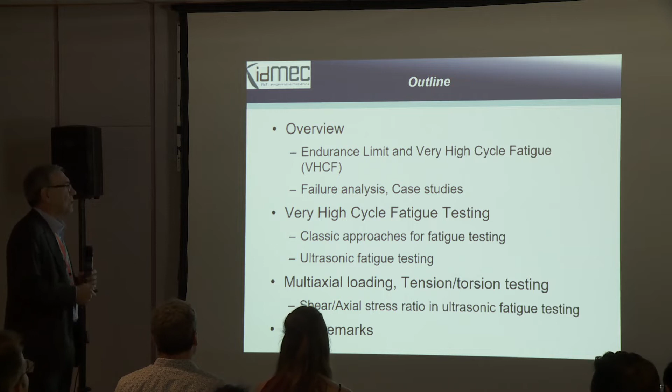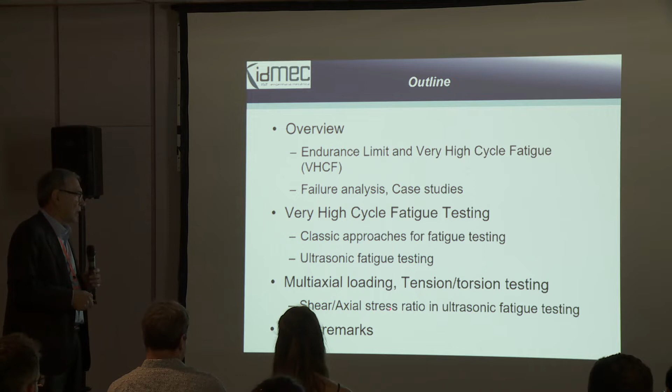So this is the summary of my talk. I will start by putting here some cases where very high cycle fatigue happens, even if it is not initiated in inclusions. After, I will present our approach for studying very high cycle fatigue based on ultrasonic fatigue testing, and I will make the most part of my talk talking about tension torsion testing with shear axial stress ratio, how we can do that.

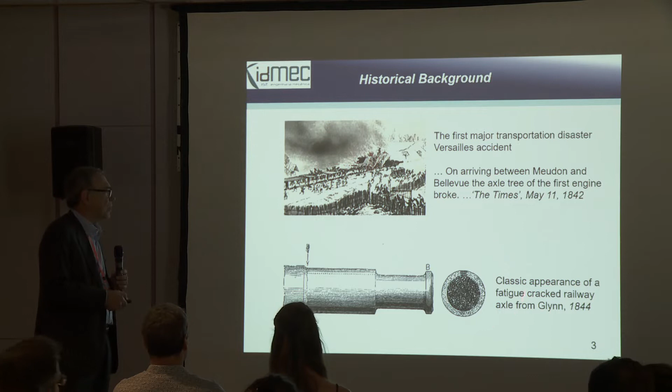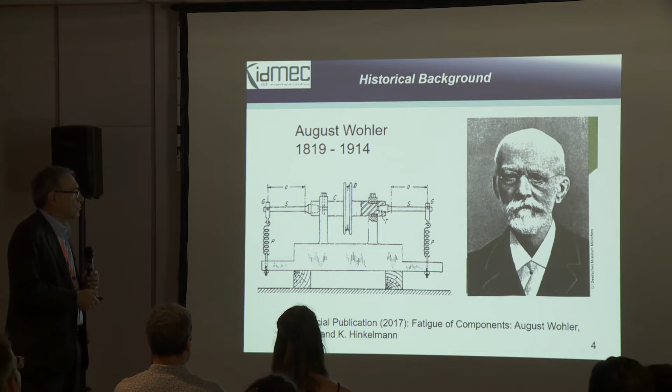So we all know that fatigue begins with railway transportation, and this was the first accident related with fatigue, and at the time nobody knew what happened, but happily August Wöhler in the 19th century introduced to us the concept of endurance fatigue and fatigue limit, but we know that this is not true.

And happily we have many failures below the so-called endurance fatigue limit, and the question that we have posed to ourselves is: is the endurance limit a simplification due to testing limitations that happened in the 19th, not early 20th century, or is it really a material characteristic?

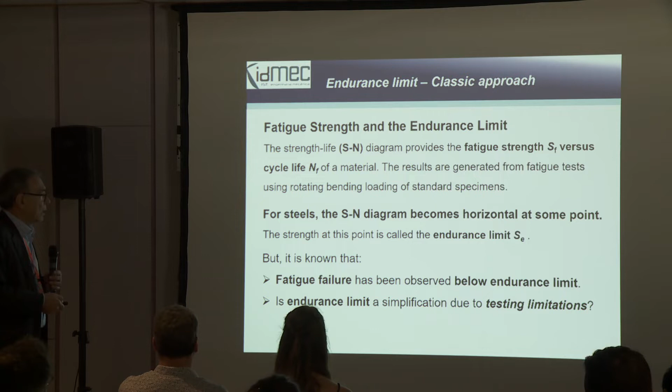So what tools do we have in order to test fatigue limit? We have classical machines for making till 1 million, 10 million cycles, and after we have the question: is there a fatigue limit?

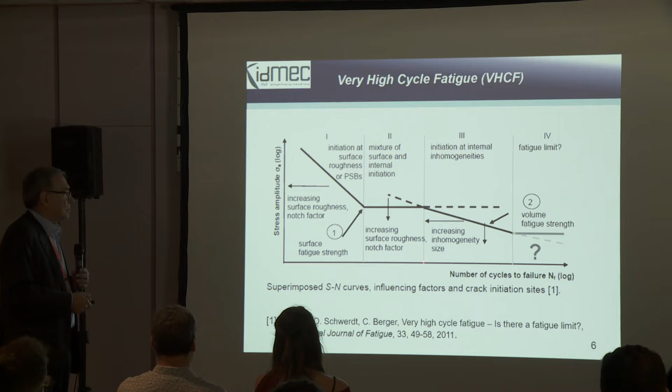There are many papers, by Claude Bathias or Pyttel, where this question is trying to have its answer. So, but going from here to there is quite difficult because we have several situations.

I will present here three case studies where this is not a very high strength steel like those ones where the crack initiation is in inclusions, but this is a low alloy steel, but high strength steel.

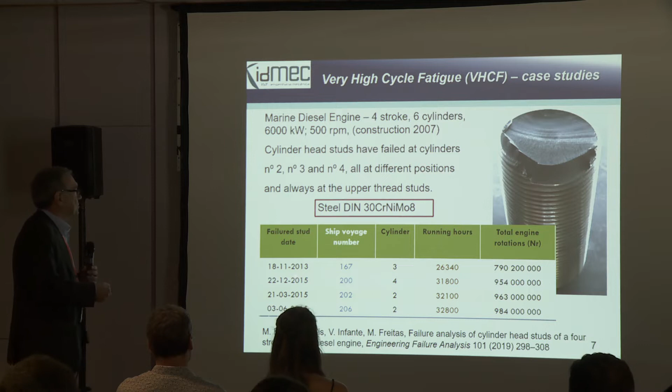For example, this is a cylinder head stud used in engines, marine engines, and you can see that we approach 10 power 9 cycles. This is not a very old engine, it has 6 years, so there is overload on an engine.

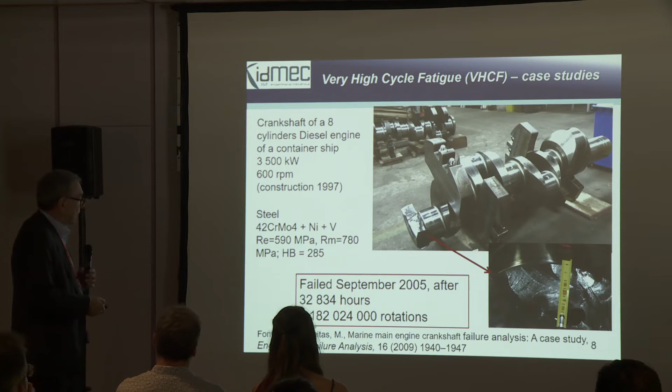The second one is that one, where here we have bending and torsion, so multi-axial loading again, more than 10 power 9 cycles. This is not a very old engine also.

And the final one, this one, where two propeller shafts also broke, and you see that there is no overload because the fatigue region is very high. And again, we are approaching 10 power 9 cycles.

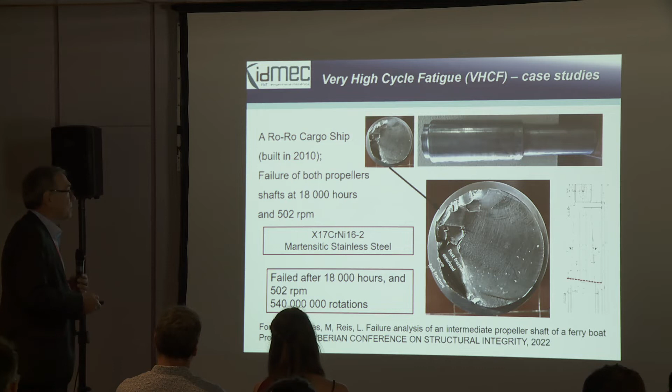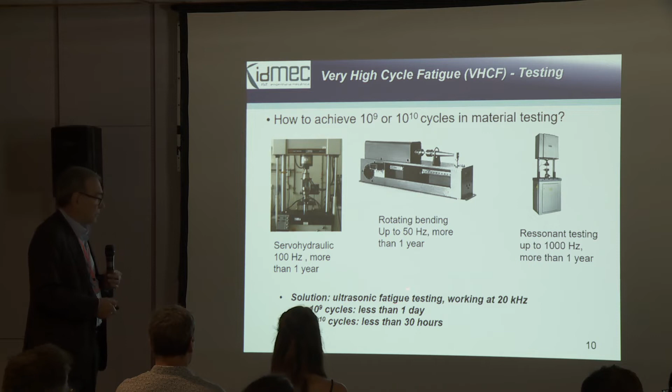So how can we solve that? How can you determine if there is the endurance fatigue limit or there is not the endurance fatigue limit? So the classical way is servo-hydraulic, resonant testing, increasing frequencies, but indeed, we thought that the solution is ultrasonic fatigue testing. We can make 10 power 9 cycles in 1 day, or 10 power 10 cycles in less than 30 hours. Of course, we have many problems because we have the strain rate effect, we have the temperature effect, and very important, we must have the data acquisition in order to control the test.

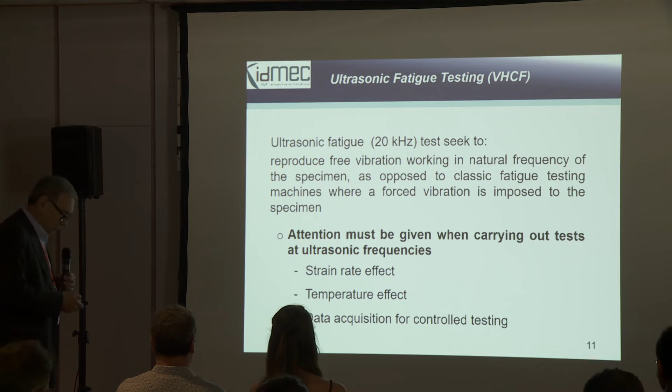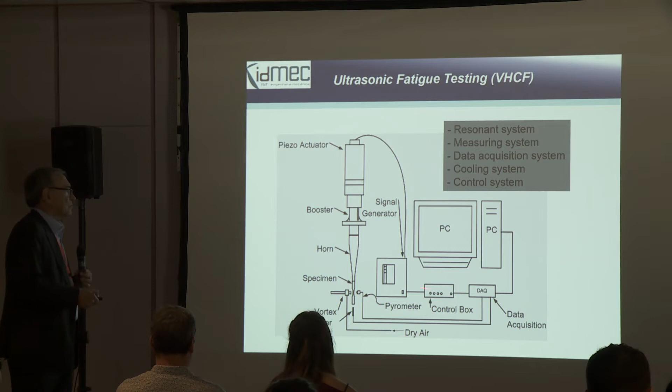relating to temperature, loading, frequency, etc. So that's why the machines normally are composed of a piezoelectric actuator working at 20 kilohertz, a booster, a horn, and the specimen, and we have all the things like cooling, temperature measurement, laser measurement. Normally we put also strain gauges there, and we have the data acquisition system that everybody has presented before.

And the idea is to have everything in resonance, either the piezoelectric actuator, the booster, the horn, and the specimen. So for axial loading, this is quite standard already, so I am not going to explain this.

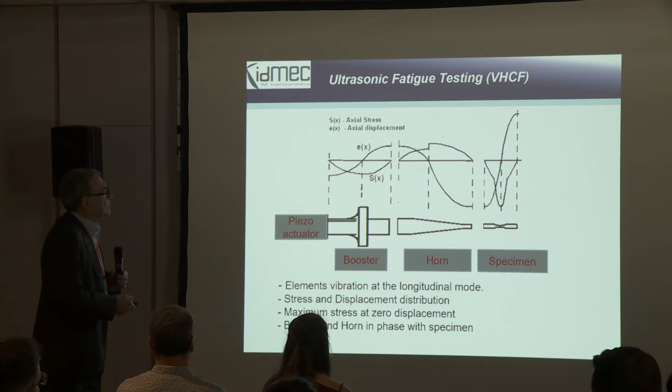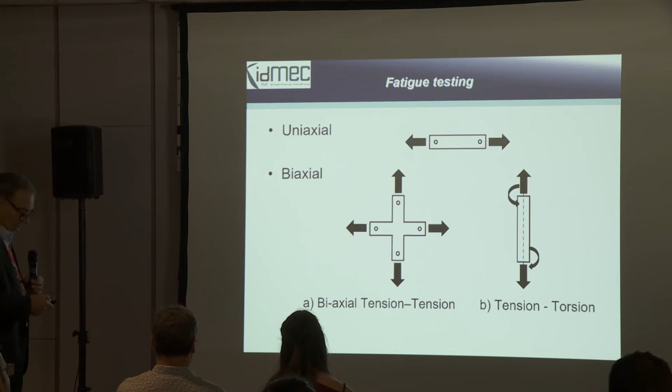What we want to do is this: uniaxial, we do not care much more about uniaxial. 2 days ago, our colleague Diogo, who worked with us, talked about ultrasonic fatigue testing of cruciform specimens. We have tension-tension, and we have tension with torsion.

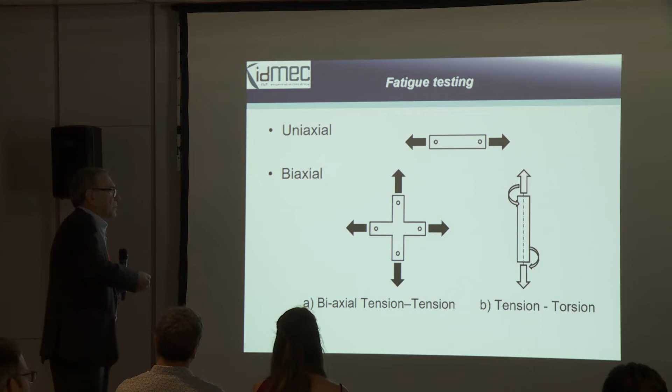And now I will present this, the tension torsion solution that we have. And this afternoon, Pedro will speak a little more about this, the technology that we have in order to achieve this. So this is our machine.

So it seems complicated, but it's not complicated because the machine is only that and only that. All the rest is the strain gauge acquisition, temperature measurement, laser measurement, and controlling. So we have 2 machines here. This is our laboratory. We have 2 machines.

And what is important is that we are making either cruciform specimens, torsion specimens, uniaxial specimens, or tension torsion specimens, always with the same piezoelectric actuator. We only change the horn and the specimen.

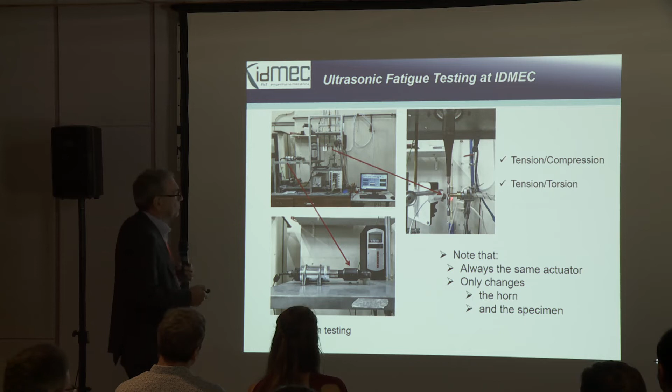And we can see, I'm not going to speak about the tension torsion, you can see our tension torsion specimen. We have 3 throats: 1, 2, 3. So this is the solution that we have for tension torsion.

Why do we have 3 throats? Because, of course, everything is resonance, either axial or torsion. And as we know, the shear modulus in torsion is about 1/3 of the Young's modulus. So we must look for the eigenfrequency in torsion that relates to that.

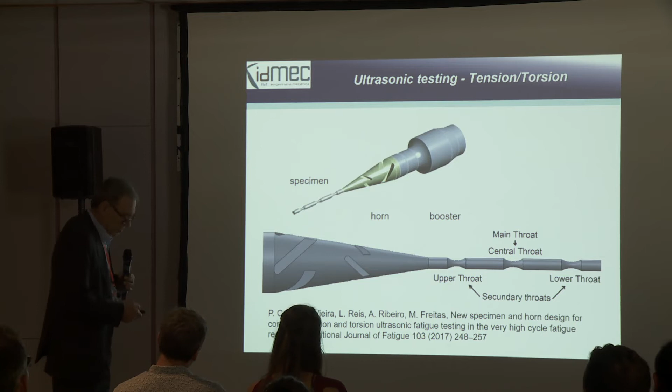So we have maximum torsion here, maximum torsion there, and maximum torsion there. But axial, the maximum is over there. So what is interesting for us is only this zone. So this is

the solution that we have. So we have the piezoelectric actuator, we have our horn. So we make grooves over there in order to transform the axial movement into axial and torsion rotation.

And after that we have here the solution with the 3 throats in order to have everything in resonance, either rotation or axial. So as we know, at this throat and this throat, we also have tension and torsion, but the tension is much lower than torsion, so the specimen will break here and not there or there.

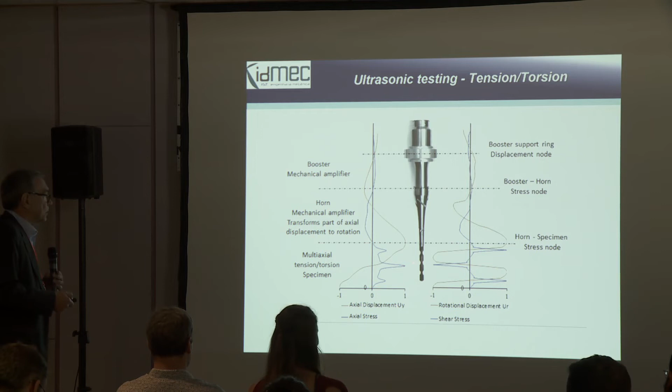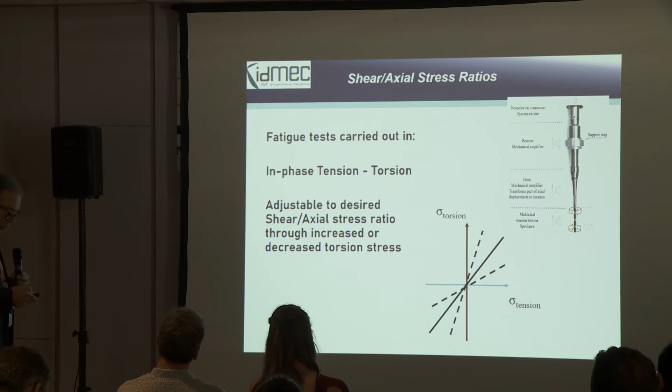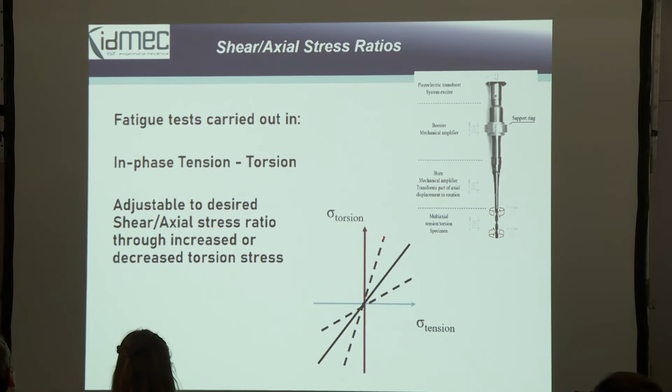So we have presented the other solution for only one tension torsion ratio. But what I want to present to you today is how we can do different shear to axial stress ratio, and what must we change here in the booster, in the horn, or in the specimen in order to have different shear to axial stress ratio.

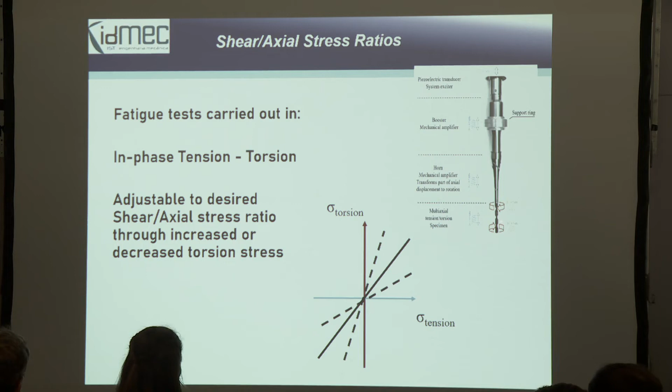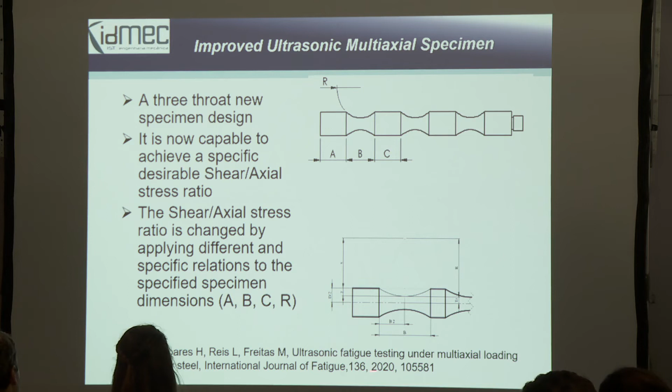So you have some explanation about this, and this afternoon Pedro will talk a little more about this in this paper. So let's see our results.

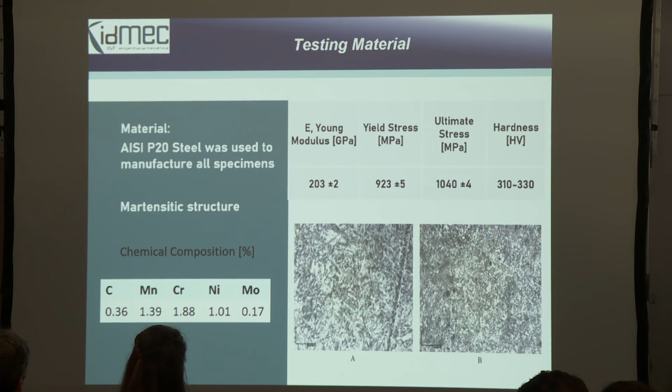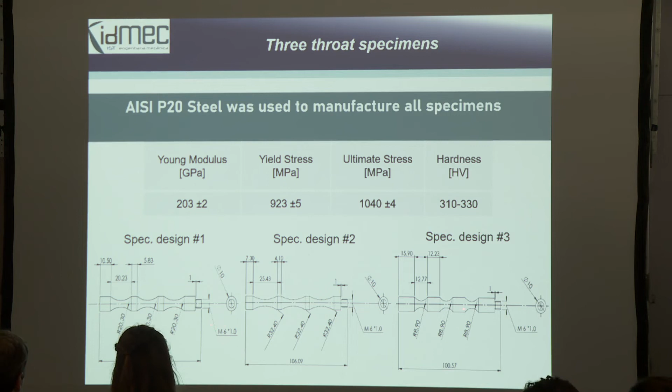And we have here three specimen designs. In each one, we will have a different shear to axial stress ratio, because we have changed the A, B, C for the same radius. So we have tested this, and we are going to present some results.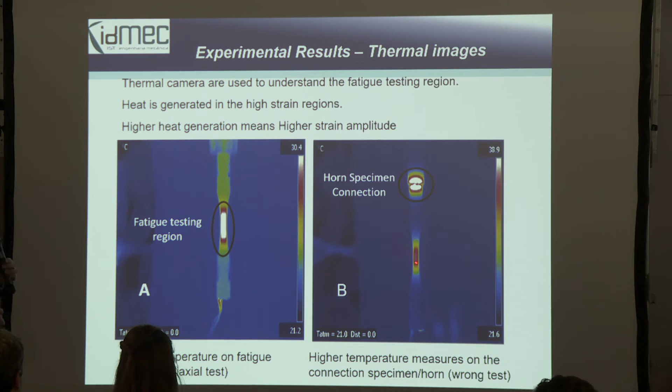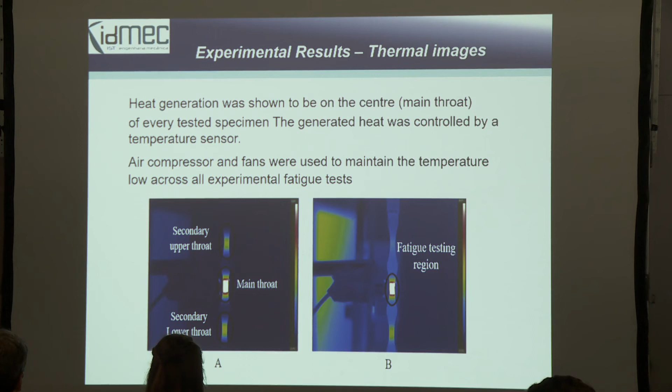So for the three-throat specimen, here we have torsion here, torsion here, and some axial also, but the conjunction of maximum torsion and maximum axial is on the main throat, so this is the fatigue region. So because we always control our temperature on our machines, normally we don't go above 35 Celsius degrees.

So comparison: for uniaxial tension on ultrasonic fatigue, we have this behavior. We cannot ever have failure in ultrasonic fatigue testing, because when we have a larger crack, we lose the resonance of the machine, and the system stops. This is different from when it's broken on a normal uniaxial tension test.

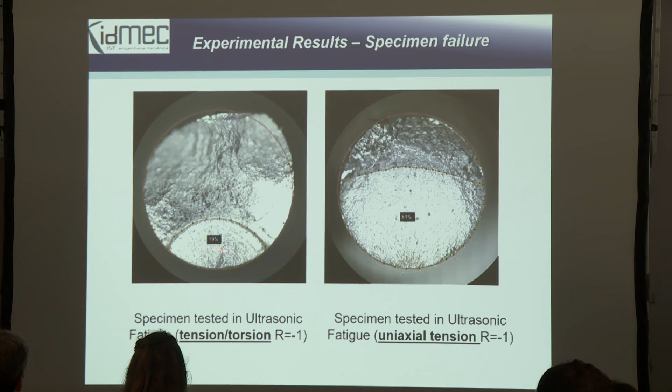And for tension torsion, of course, this zone is much lower, because we have a conjunction of both stresses, and the difference between the shape of the crack is also different.

So three different stages for three different shear to axial stress ratio. We have, of course, different crack proportions, but also we can measure the inclination of the initial crack, because it depends on the shear to axial stress ratio, as already observed in servo-hydraulic tension torsion fatigue testing machines.

So we have also quite a lot of experiments in servo-hydraulic ones, and this is coincident. So we think that these are correct, either in ultrasonic fatigue or in the servo-hydraulic ones.

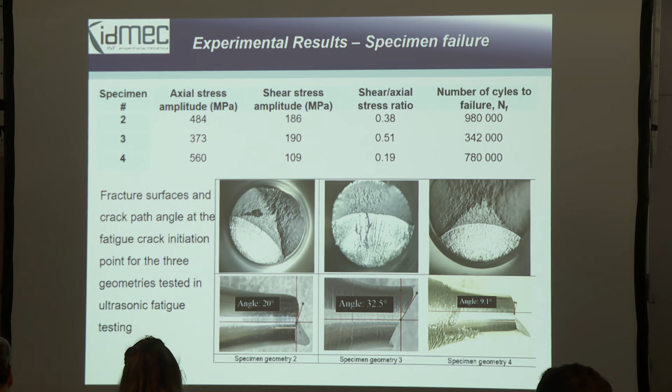And okay, some results. We have divided this, we have put here axial stress ratio, because it is that one that is always constant between the three specimens. So we have divided this where the shear to axial stress ratio is higher than the equivalent von Mises equivalent stress, or is lower. And we have two different behaviors.

We could not have many tests over there for 10 to the power 9, because we only have a few tests yet. This is a study that is ongoing, but we see different behavior with this.

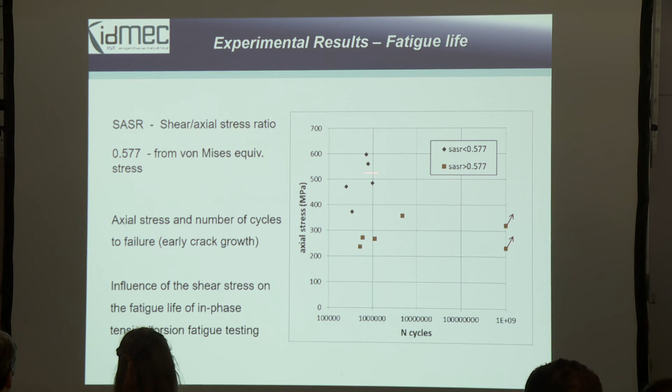And the second one also, the inclination, the calculated angle according to the shear to axial stress ratio, again for higher shear stress than axial one, or higher axial than shear stress. So there are two different behaviors.

This is absolutely comparable with servo-hydraulic torsion testing machines. So we think we are on the correct solution for having in ultrasonic fatigue testing the three solutions: for axial, for cruciform, or for tension torsion.

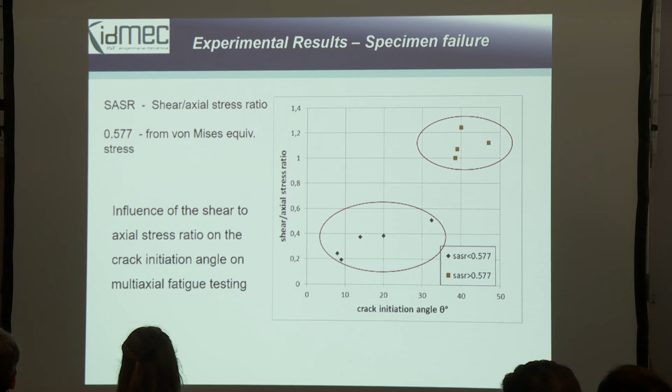So the conclusions: we think that piezoelectric plate fatigue testing machines are working very well now. We are very confident with this. We must only take care about temperature, frequency, and to have very good data acquisition. We use strain gauges, we use laser measurements either for rotation or for axial.

So in order to have axial torsion fatigue tests or cruciform fatigue tests, like we have seen in the presentation by Diogo, we use always the same piezoelectric plate. We only need to change the specimen and the horn. So this is a very cheap test; we don't need to have a very expensive fatigue test.

And we have achieved different shear to axial stress ratios with ultrasound just by changing the specimen geometry. So thank you for your attention.